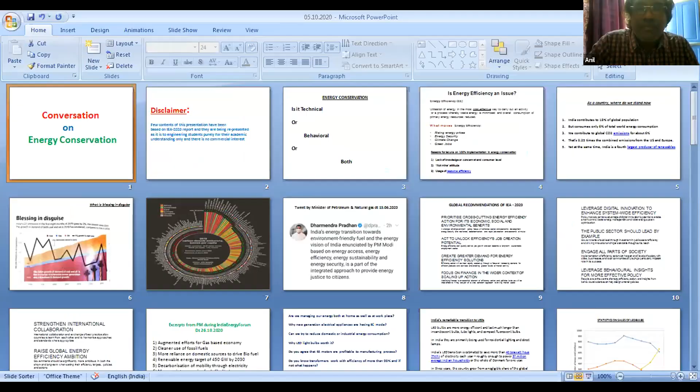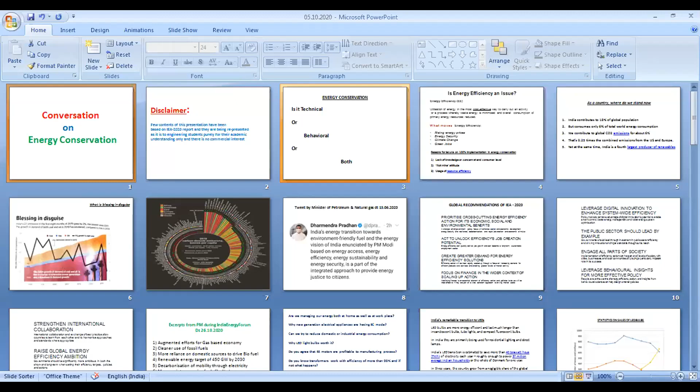I'll just share the presentation. Just guide me whether it is visible, audible, everything. Yeah, okay sure, sir. Is it visible? Hello? Yes sir, it is visible. So it is in slide mode, right? It's not in slideshow, sir. It is not in slideshow. Okay, yes. Can you click on the slideshow icon, sir? So that... yeah, slide can, but why it's not going? One second. How about... hello? Yeah, one second. Yeah, is it in slide mode? No sir, it's still in the... yeah, now it's in slideshow. Problem, yeah, now it's correct sir. It's in slideshow. Now it's correct? Okay, yes.

Good afternoon to all, one and all actually present for this program. I'm very glad for this program, just sharing my thoughts regarding something on energy conservation actually. As an institute or as a university, I'm sure you guys are doing a lot of innovations, incubations, and there is a quality oriented approach actually. This is the need of the day, to be more self-reliant under the Prime Minister's mission of Atmanirbhar Bharat actually.

Whenever we need to innovate, before that we need to understand the concept. In our domain, where energy is concerned, I don't think you guys can exclude this domain because you're all from mechanical engineering, or wherever, whether they belong to engineering stream or not. I don't think anybody can think of usage of energy, because energy in some way or other, in some form or another, is internally linked to our lifestyle, in personal capacity and in professional lives also. Nobody can think of doing any activity without usage of energy, because I can tell you, energy is the engine to the economy. Simple, that is my punchline, actually always I used to say. So let us have some conversation.

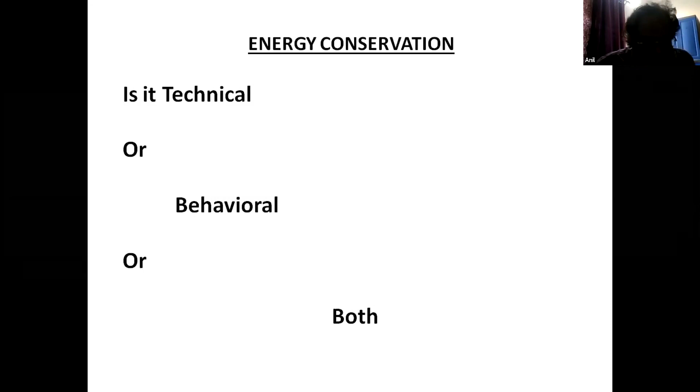At the same time, whether you have knowledge or not, first let us understand - we are not here, let it be water, let it be any food material, or let it be energy, anything. Fundamentally what we need to have is, we should not let any resource go to waste. We are here only to use it and to save it, so that it's reserved and preserved in the ecosystem for tomorrow's needs for all of us. So if you ask me, yes, it is both - it's behavioral, because the integration of both aspects only will give the full-fledged implementation.

So with this, I don't think energy efficiency is an issue, because energy efficiency is the next level of energy conservation actually. I'm sure you all know energy efficiency, so I'll not go into detail. Energy efficient is nothing but the most cost effective way of doing the activity with the available resources, while the output is more, the waste is less, consumption is less, and without impacting the process or activity, whether it connects to manufacturing or anything else.

Moving to energy efficiency - you all must be knowing, every day the petrol and diesel prices change at midnight. Why is it changing? Because government of India is trying to cushion out all the changes coming in the international scenario, because 90% of crude petroleum is coming from outside the country. So as and when they change the prices, we have no choice but to change our prices according to manage the changes in the international scenario.

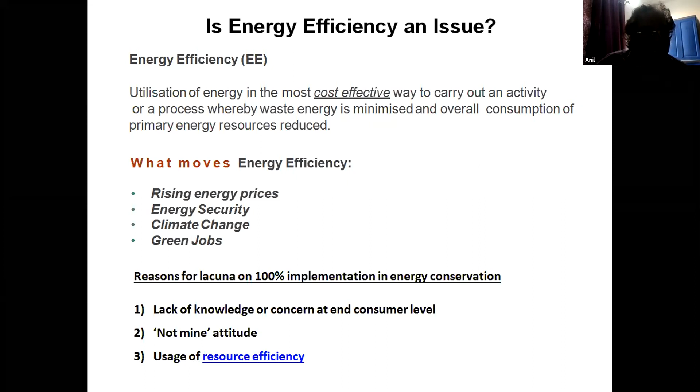Everybody should act responsibly. Everybody should act sensibly so that this most precious resource is saved. At the same time, everybody should know how to use the resource efficiently.

Let us take small statistics of this country. The population of India is almost 132 crore citizens, which is something close to 20% of the global population. But what is our energy consumption? Is it at par with the population? It is only 6%. Why is it so low?

Because we are in the first phase of the energy diagram. Let me show you a presentation. If you look at our energy consumption, which is 6%, it is not at all the average energy consumption of the world. It should be somewhere close to 10 to 12%. That means by the time it goes up to 12%, we would have the most advanced systems with high energy efficiency in practice available in our country.

At the same time, I am not saying just increase energy consumption without increasing efficiency and conservation in practice. We should increase consumption for the purpose of industrial activity, for increasing manufacturing activity, not just for the sake of increasing it. At the same time, I am contributing as far as emissions are concerned.

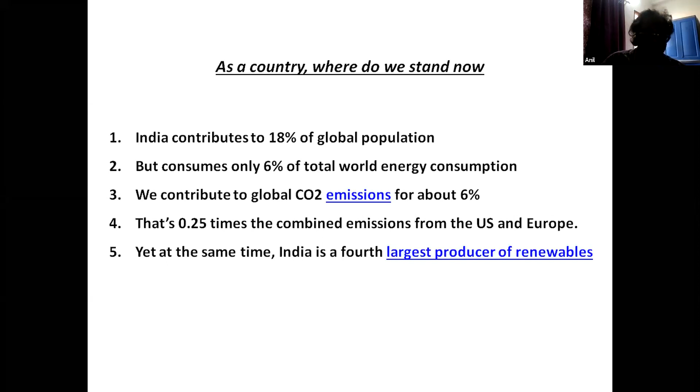Because of the pandemic situation, COVID has attacked all of us. In the month of March 2020, all industrial activity and manufacturing processes were halted because of the lockdown. Since there is no industrial activity, there is no pollution or emission. But we cannot clap for this, because industrial activity leads to an increase in GDP.

When we increase our GDP, it means our country is moving in a positive direction with respect to growth and other things. Now the economy is recovering, and we are now worried about emissions and pollution because pollution is now going up again. Let us see what all we have to go through.

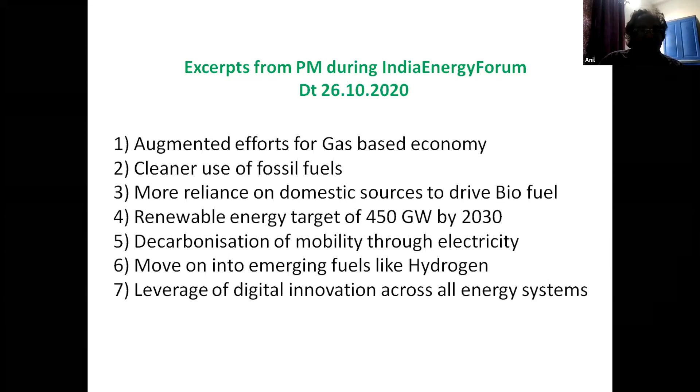Some questions, whenever you implement energy conservation: are we managing energy both at home and workplace? Why do new generation appliances have an energy conservation mode today? Even if you forget to switch off the appliances, they automatically go into energy conservation mode. For example, an air conditioner, you set the temperature and put it into energy conservation mode, and automatically when the room is shut off, the energy is saved. So this is nothing but the energy conservation mode.

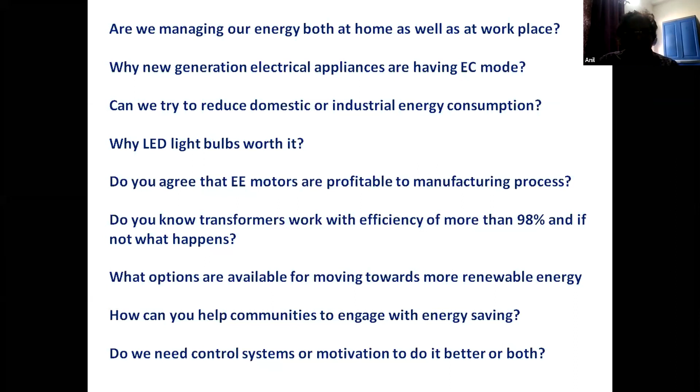Like that, how many of you know how LED bulbs are working? They are costly and expensive, but at the same time, when you compare with the performance of incandescent bulbs and CFL bulbs, normal LED lights will give a lifetime at least 5 times longer. So LED bulbs are really energy efficient. There are a number of questions we have to ask ourselves as and when we join the industry, like energy efficient motors, transformers, and what options are available, and so on. So this is the LED bulb story in the country.

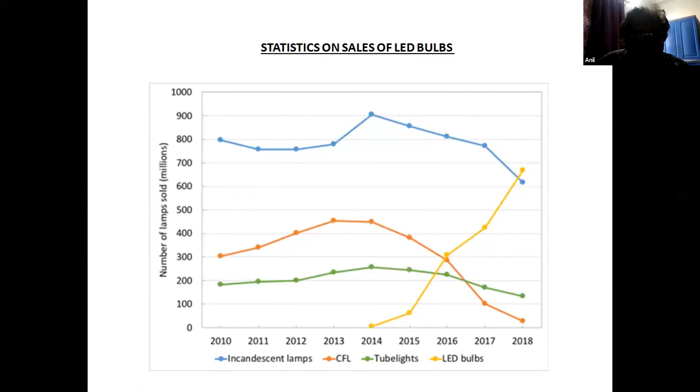Look at this. For the last 10 years, incandescent lamps are coming down, meaning usage of incandescent lamps and CFL bulbs is coming down. Tube lights are almost coming down too. At the same time, look at these LED bulbs, they are going up because of realizing the importance of the usage of LED bulbs so energy is saved. Just look at that, our neighboring state, Andhra Pradesh, and across every state, the bulbs and tube lights have been converted to LED bulbs. So these are the major achievements, friends.

Around 75 crore people have gained access to electricity, and the government is ensuring today the reliability of electricity supply. They have also started increasing the usage of kerosene and natural gas in cooking applications in the remotest parts of the country. Earlier in villages, they used to burn biomass for cooking. Today, everything has been converted. Other than that, off-grid electrification solutions, renewable wind, and so much energy is being generated.

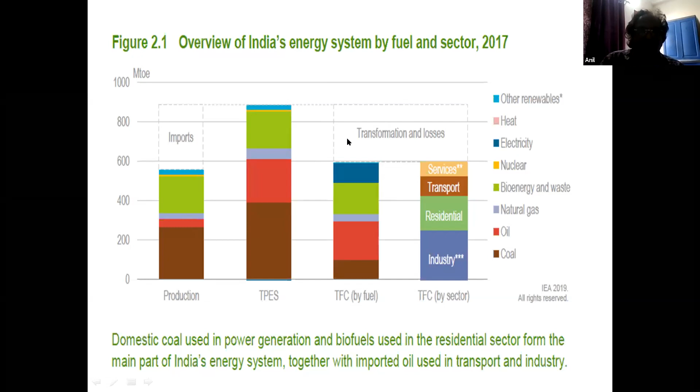Now this percentage is going up. Every sector has its own categorization of products. So just look at this. These are the trends in the growth of the economy.

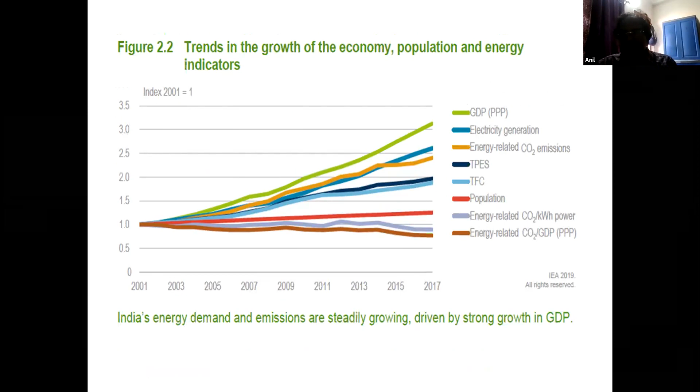The GDP is growing, electricity generation is growing, electricity energy related CO2 emissions are growing, total primary energy supply needs are growing, total fuel consumption needs are growing, population is growing, everything is growing. When population grows, everything grows, so consumption also grows, but at the same time we should develop a system so that energy conservation happens.

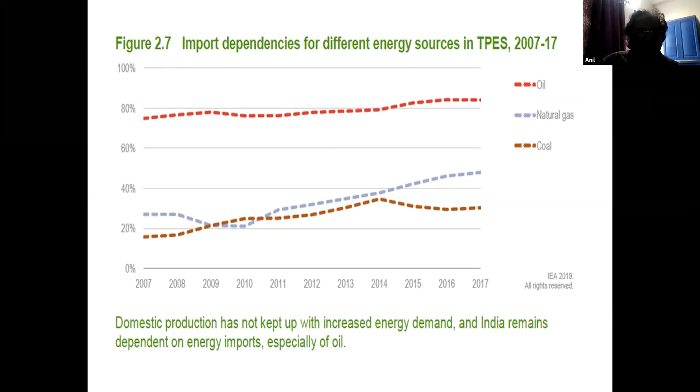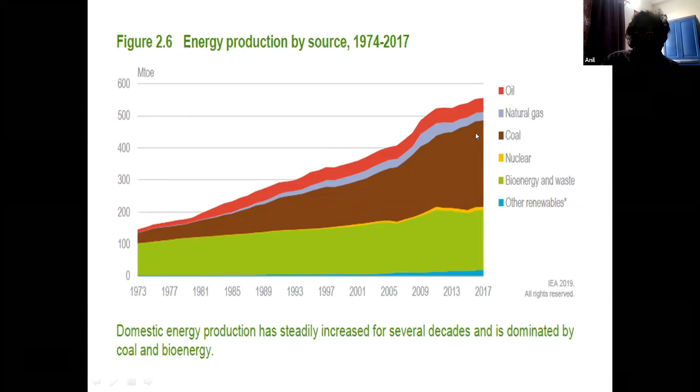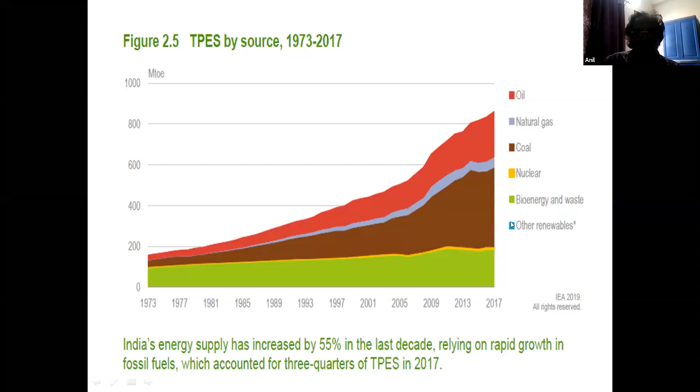And this is the total supply by source. That means I have to ensure the increasing needs of the population, and according to that I have to produce more, hence everything is in increasing mode.

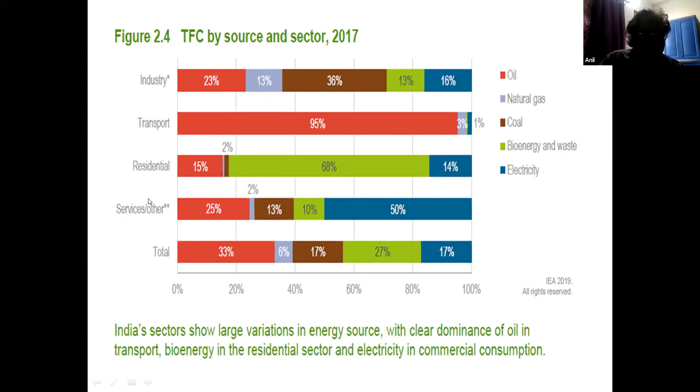Natural gas I am using for the generation of electricity. Coal, I am using 36% for the generation of electricity. And electricity, the final electricity usage, is also very high because I have to run operations. At the same time, this is the segmentation in transport, residential, services, and so on.

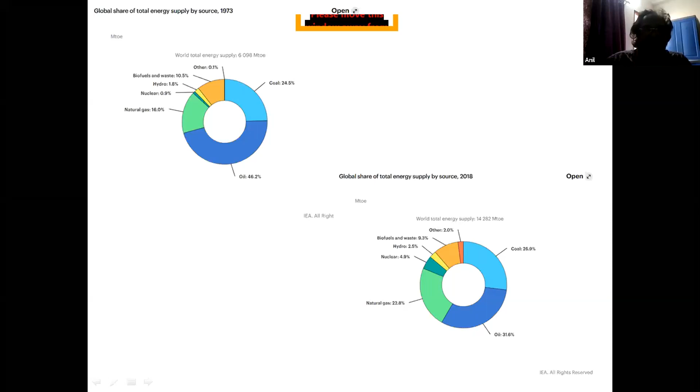So this is the story behind renewables and non-renewables. And 2020 is the turning point because of COVID and the pandemic situation, and of course a reset point for climate as well.

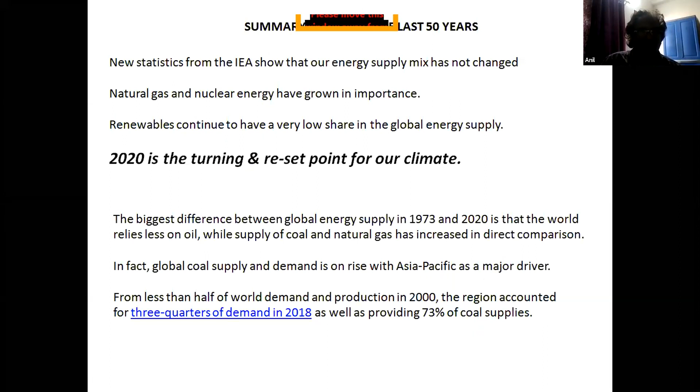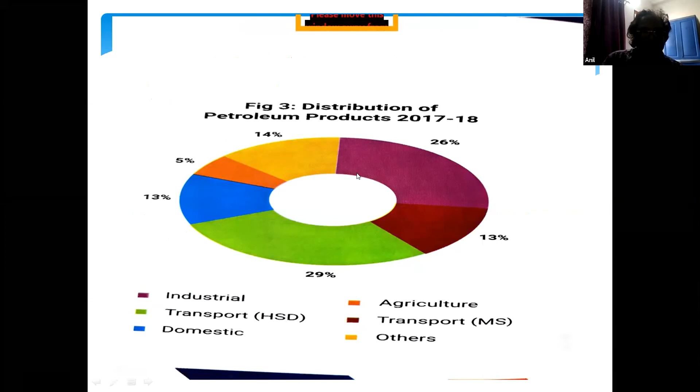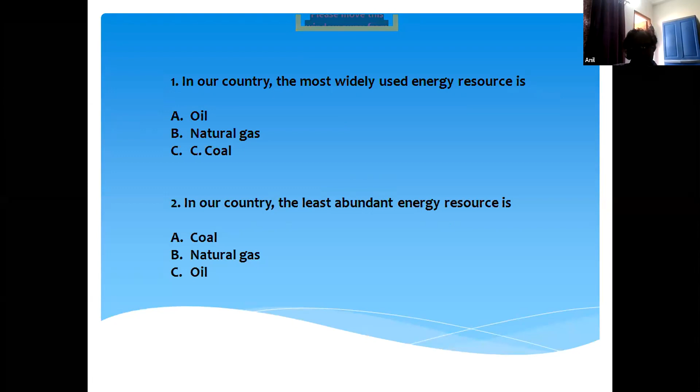In our country, the most widely used energy resources are oil, natural gas, and coal, whereas the scarcest resource is oil, for the simple reason that oil is not available domestically. 90% is imported from outside the country. This is the threat, my dear friend. If I continuously say save energy, you may not listen to me, but if I say this is the threat, possibly you might listen.

The oil reserves in the country will be there only for 20 years. After 20 years, I have no idea, I cannot guarantee whether oil will be available or not. But as far as gas and coal are concerned, no problem. Most of our processes are dependent on oil, hence we need to save petroleum products and oil-related resources. So we need this kind of education, to understand the process and couple it with experience, so that we can run our operations without any problem.

Metro is a classic example of energy efficiency because they don't use petroleum products, they only use electricity, and there are so many other examples also.

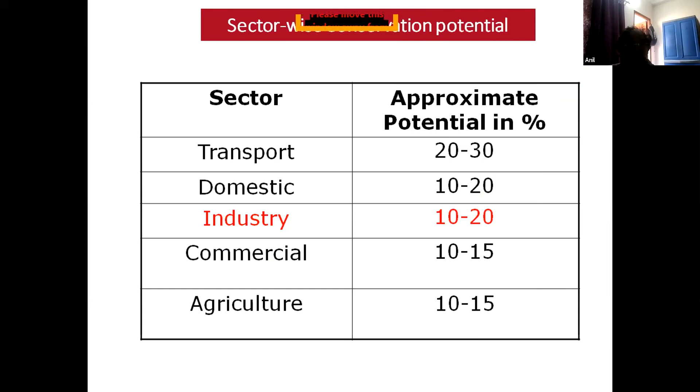transport, domestic, industry, commercial, agricultural—there is an approximate potential of somewhere close to 10 to 30%. Even today, if you decide, that much potential is available.

The Petroleum Conservation Research Association, as a part of the Ministry of Petroleum and Natural Gas, Government of India, is supporting the industry in terms of organizing studies, seminars, workshops, training programs, exhibitions, audits, consultancy, certification, so many things actually.

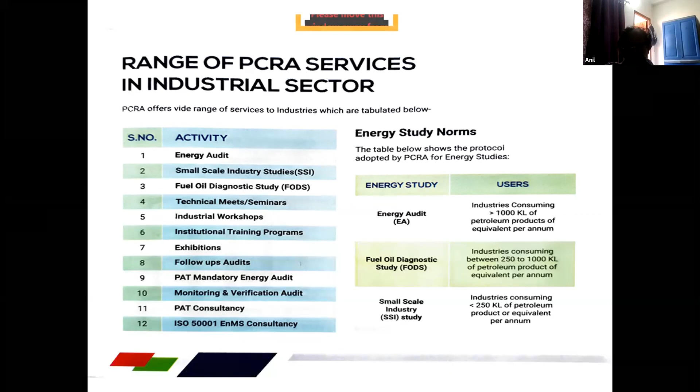That means the Government of India has given certain measures to all the large scale industries with high consumption of electricity, so that if they follow those practices, their electricity bills will come down, emissions will come down, and energy will be saved, both in terms of thermal and electrical.

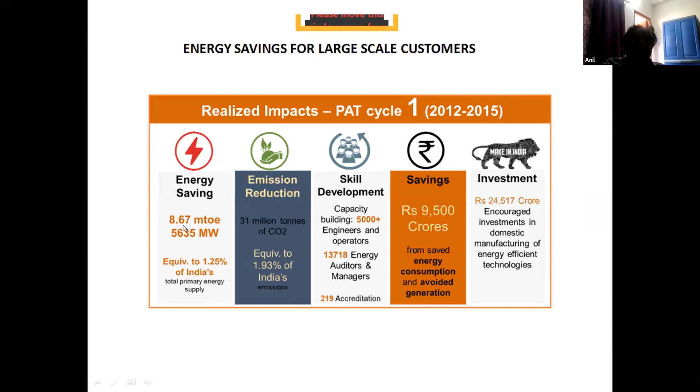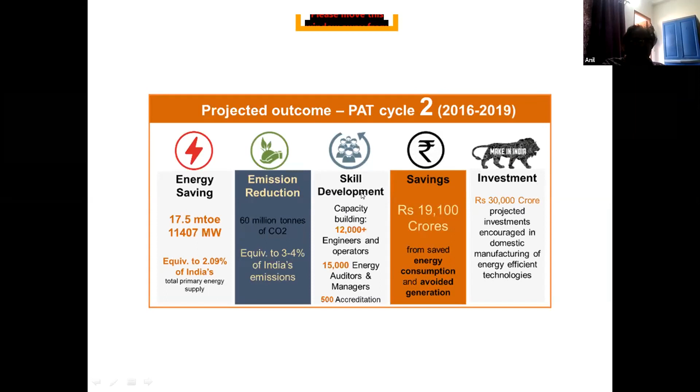In 2012, at the beginning of the program, there were hardly 400 customers. Today the number has gone up, almost double, to 800 customers.

So friends, you have no option—save energy. Saving 1 unit of energy is as good as equal to 5 units of energy generated.

In the year 2008, the Government of India saved somewhere close to 53,000 crores, other than thermal and electrical savings, and a lot of carbon dioxide emissions also got reduced.

These are the alternates, because yours is the Innovation and Incubation Council—start thinking on these aspects. I'm sure you all must be working on

ACs, air conditioners, and we are also trying to reduce dependency on imported petroleum products by adding biofuels. Today, the Government of India adds ethanol around 5 to 10% in petrol, and biodiesel around 5 to 10% in diesel.

The Government of India is saving somewhere close to 1 lakh crores. Other than that, new domains are opening up: electrical vehicles, LED lights, natural gas, geothermal, wind, biomass, and so many new areas.

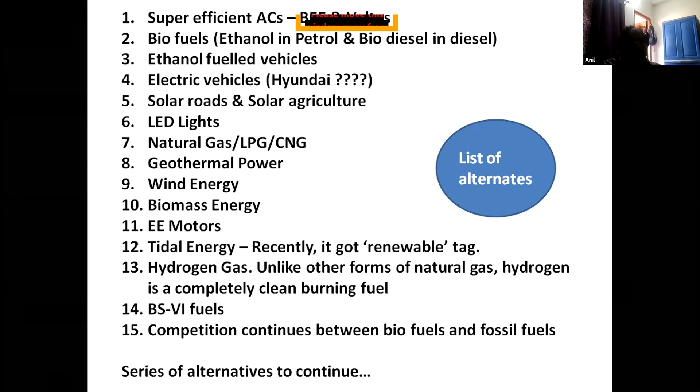These are the emerging areas for the institutes to work on. So PCRA also helps in

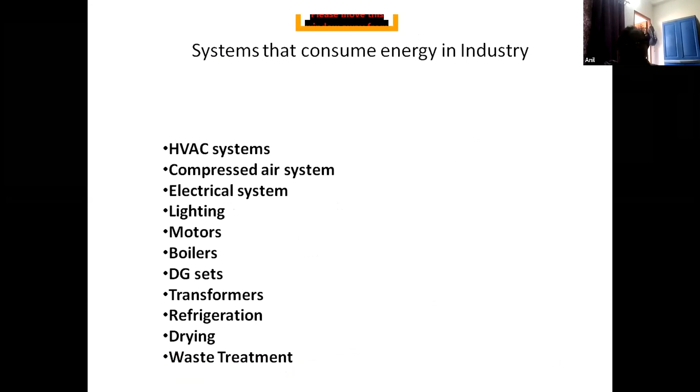management systems by organizations, institutes or industries via ISO 50001 certification, that consume energy in industry, starting from heating, ventilation, air conditioning, compressed air systems, electrical systems, lighting, motors, boilers. If I have to cover energy conservation fully, it is not possible in 1 hour.

So these are some examples of energy conservation. As I told you, the population goes on continuously, and at the same time, the demands will go up, but

the losses are minimized. The system efficiently distributes the available energy so that the system becomes efficient.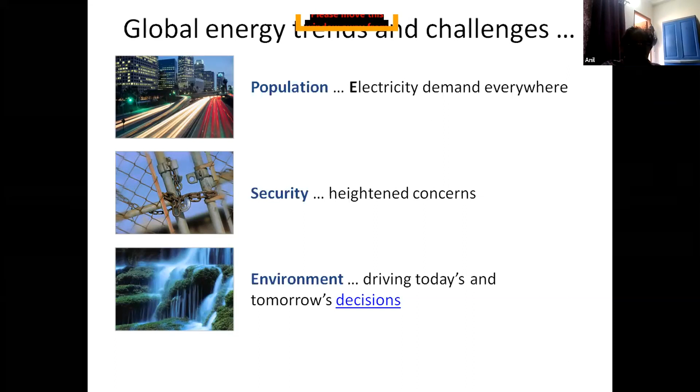Other than that, we must meet today's and tomorrow's environmental needs by causing less disturbance to the ecosystem.

The energy technology will be driven by socio-economic trends. So many changes are happening overnight. The government, academia, and industry have to play a role.

My first statement is: energy is the engine to the economy. Manage the resource and respect the resource. At the same time, try to create

something that helps you save the resource, and make it a habit. Take it as a habit. The life will be greener.

Otherwise, if you continue to misuse it, life will be like this. So thank you. The future depends on what you do today, and you have a lot of space to save energy.

This is a small program on some of the Government of India's initiatives and measures in the area of energy conservation.

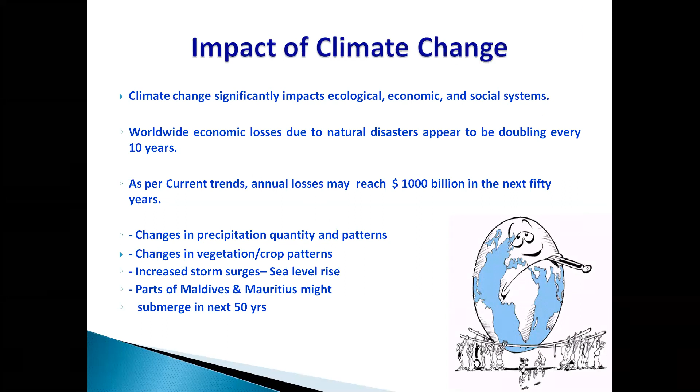So, global warming, everyone knows about global warming. Because of the rise in temperatures beyond 2 degrees, you can see this thing. In short, Chennai will be nowhere and Bangalore will become a coastal city. Having seen this, we'll see some of the next topics.

I'll rush through because he has covered most of the areas. So we will start with equipment, starting with compressed air. Air is always free, but compressed air is very costly, very expensive.

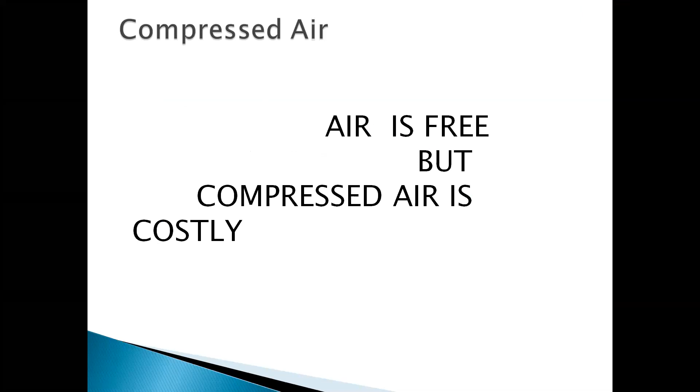When I say compressed air, what is the efficiency of the compressed air system? The compressor system means compressor, receivers, pipelines, and the FRL system all put together. The efficiency is just 10%, so obviously that is very, very less. If possible, you try to avoid compressed air to the extent possible.

There cannot be any industry which does not use compressed air. It's a very popular resource. That's why I'm starting with this.

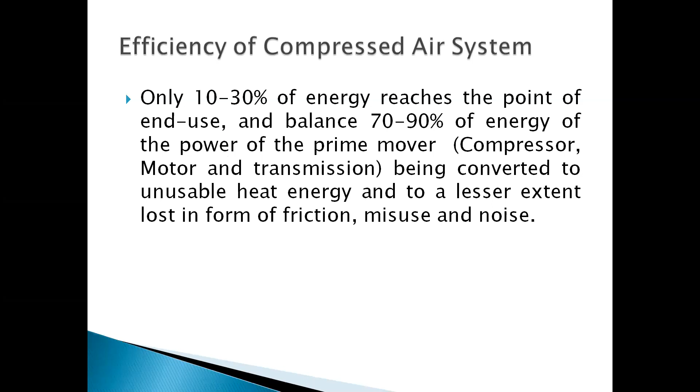Compressed air is denoted by free air delivery, at a standard condition of temperature, pressure, and composition. The factors which affect compressor performance are altitude, barometric pressure, and temperature. Compressed air consumption in winter is less, in summer it is higher. Similarly, what works at Chennai cannot work at the same efficiency when you go to Coonoor or Ooty, because of the difference in altitude and pressure.

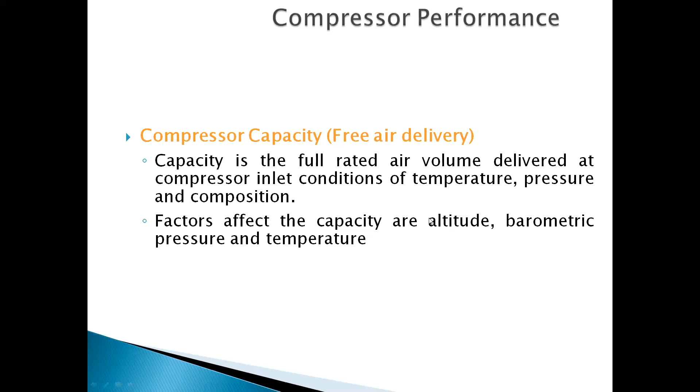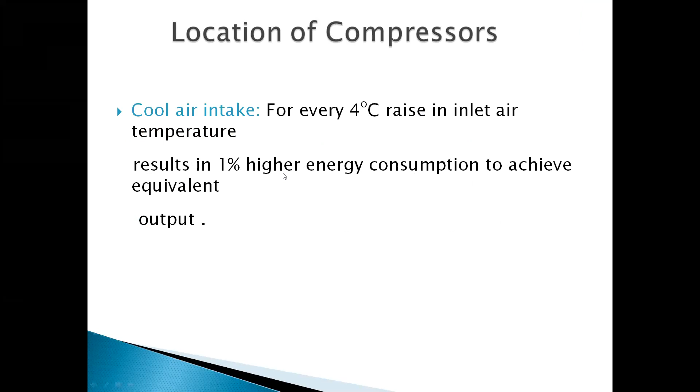This is the thumb rule: for every 4 degrees rise in inlet temperature, 1% higher consumption will be more. And again, elevation, we discussed.

The other problem is, don't standardize on pressure. Use the pressure only what is required. Reduction of even 1 bar will reduce your energy consumption by 6 to 10%. What happens when you require different pressures? For example, some machines may require 5 bars, some may be at 6 bars, some at 2 bars, and so on. You should have separate lines, segregate the lines.

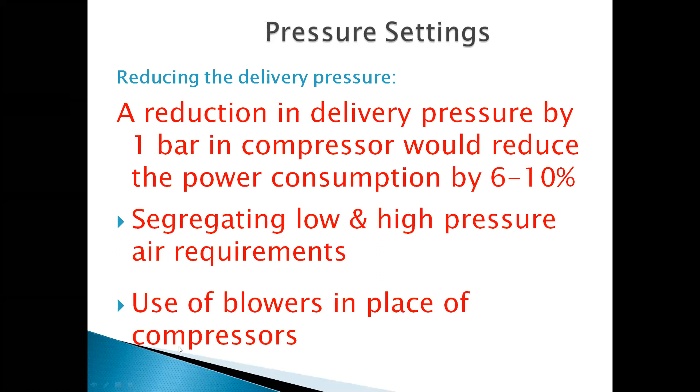Where the pressure required is less than 1.5, use blowers instead of compressors. Eliminate compressed air there, that is important. So check the pressure drop randomly.

Even in your labs you might have seen the compressor. Check the compressed air pressure. When the pressure drop is above 0.3 bar, maybe there are some losses, transmission losses may be there. Sometimes we have the habit of adding more and more compressors at the source side without bothering about the line. So rework the line, or there could be leakages, or the demands could have increased. We check it up, that is the idea of frequent pressure drop measurement.

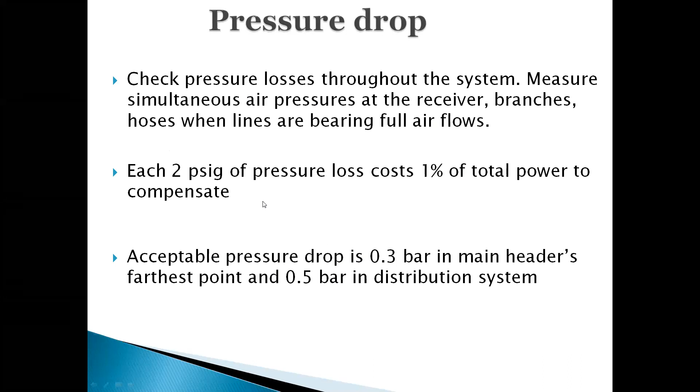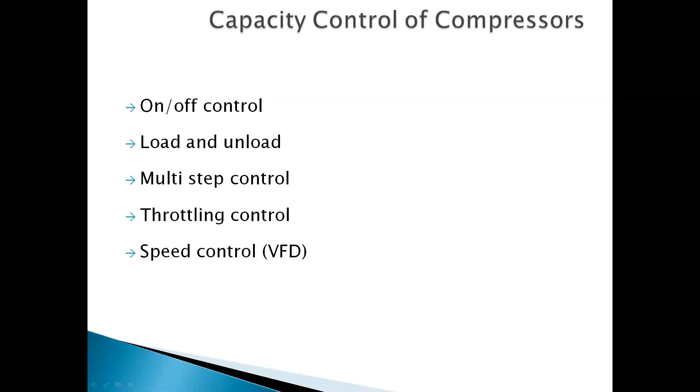Let us see one problem. Compressor leakage is very common in industry, so you need to quantify the leakages. All you need is a stopwatch, nowadays even mobile phones are okay.

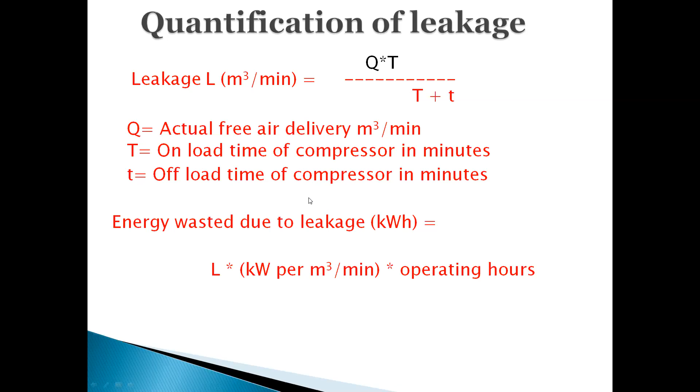You stop the compressor, use the line's supply, start the compressor automatically, it goes to full load, then cut-in cut-off takes off. Then there is a simple formula, and you can calculate how much percentage you are wasting due to leakages.

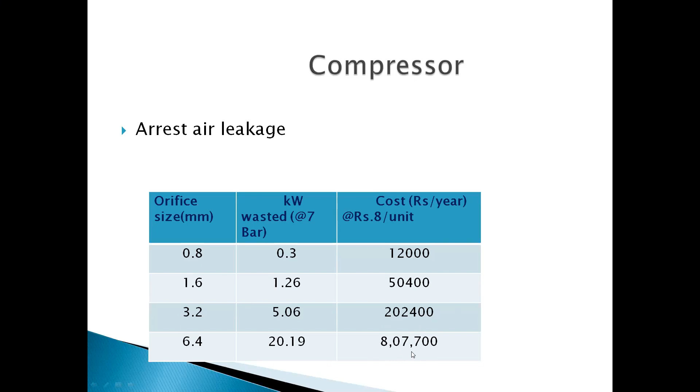Second one, pumps and fans. We'll go to the next equipment. Pumps are very common, even in industry, agriculture, everywhere. And all centrifugal fans and pumps exhibit the identical characteristics. They follow one law called the affinity law.

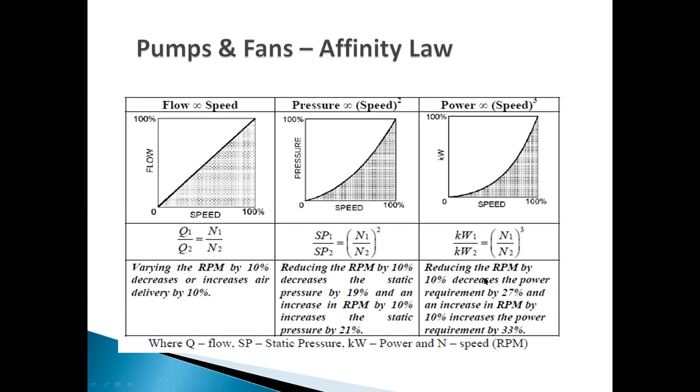When you reduce the speed by 10%, your flow is reduced by 10%. Pressure by 19%, power by 27%. So again, the conventional method, start-stop control, is there. Bypass valve, there won't be any savings. Again, throttling is a very bad practice, not a good practice at all.

If you oversize the pump, you can trim the impeller to the excess, to the tune of around 10%. Or you change the pump itself. Or the other option is variable speed drives, where there is a fluctuation in load.

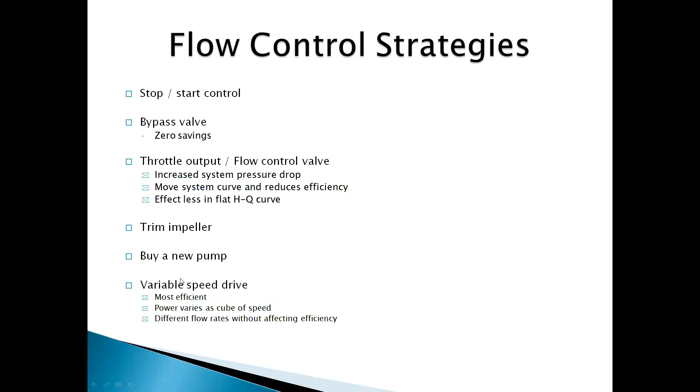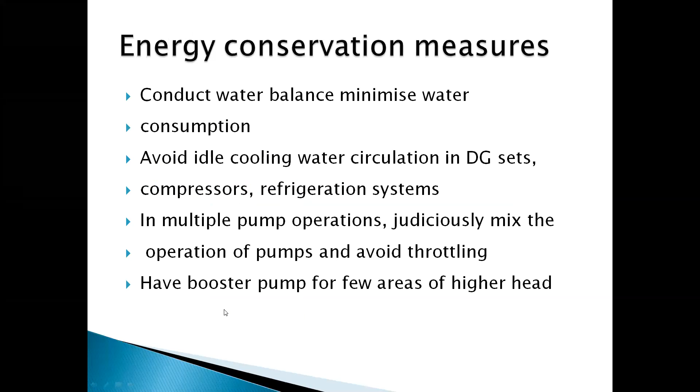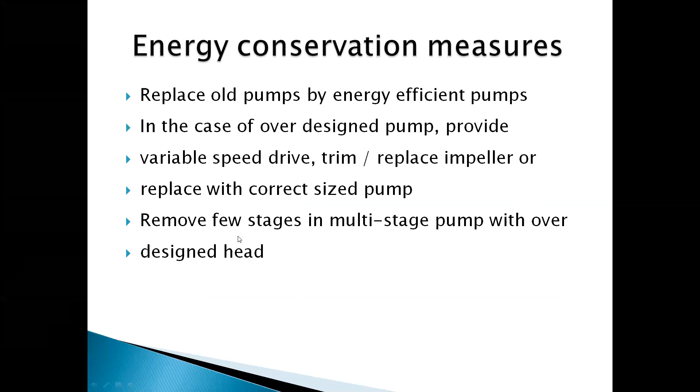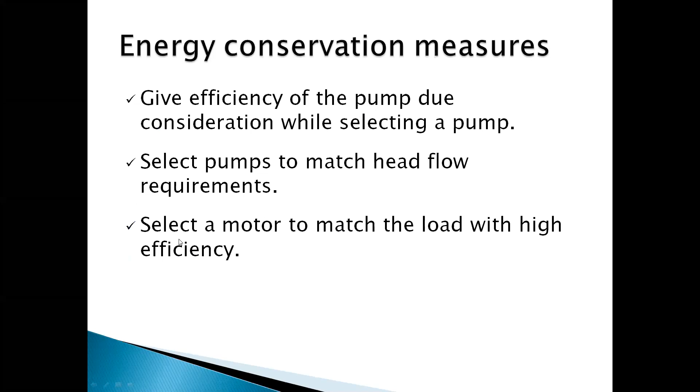Whenever you are selecting a new pump, give efficiency of the pump due consideration. And most important, select the motor to match the load, don't oversize it, so that the efficiency is maximum - an energy efficient motor and an energy efficient pump. What is an energy efficient motor? We will see a little later.

Okay, all these things we discussed. Then we'll go to lighting. Lighting - the operating cost is 85%, initial cost is only 15%.

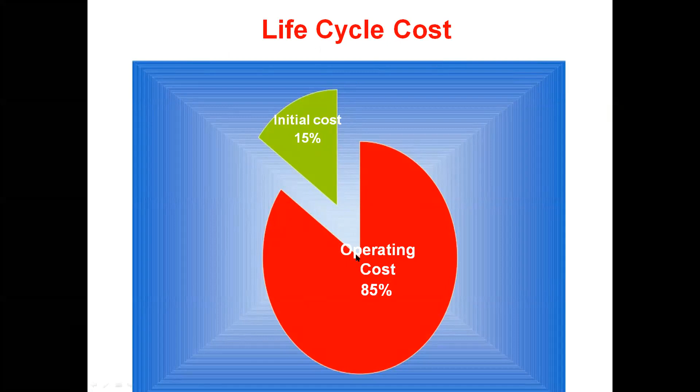Focus always on the operating cost. So we will see what is the color rendering index. I'm rushing through due to paucity of time. When the CRI, the color rendering index, is close to 100%, as at sunlight where CRI is 100%, you will see a more clear picture. As it keeps reducing, you will see a distorted picture, sometimes different colors.

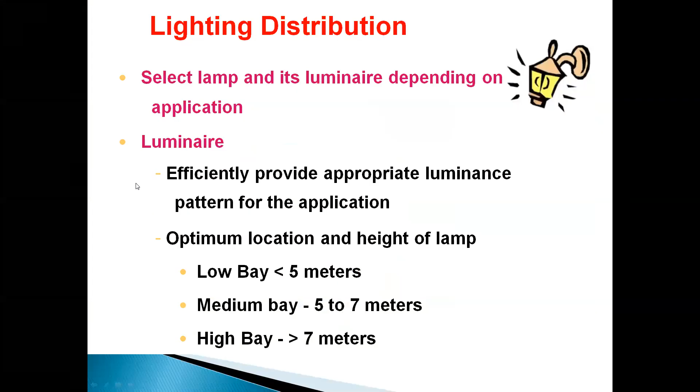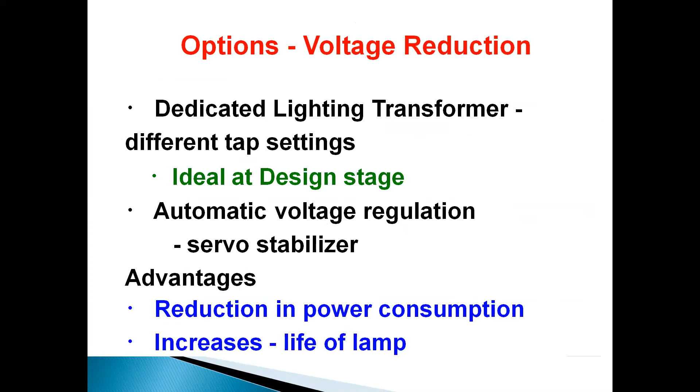So next, lighting control is important. Always distribute it properly - don't keep a single switch for all the lights. That's not a good practice.

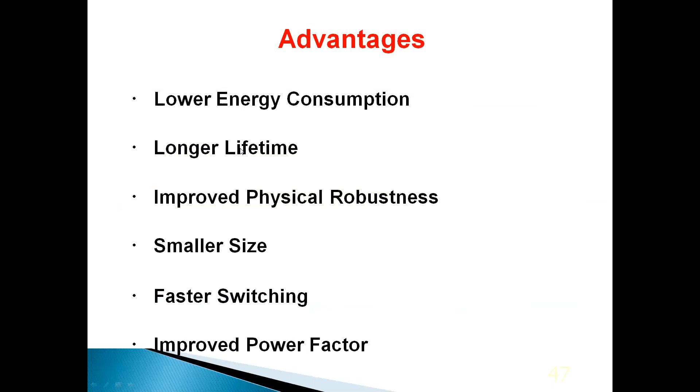LED lifetime is around 1 lakh hours, so LED is a very good option. It's also a somewhat greener option. One case study: a 150 watt light replaced with a 30 watt LED light gave a payback in 17 months. The advantages are longer lifetime, you don't need to keep stocks, and of course avoiding mercury.

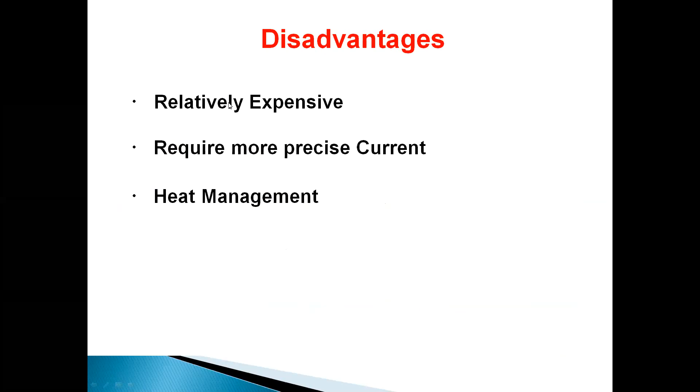Disadvantages - heat management is very important, don't go in for a cheap make. It's relatively expensive, initial cost is more, but if you work out the life cycle costing, it will be viable. So use light pipes to maximize your solar lighting.

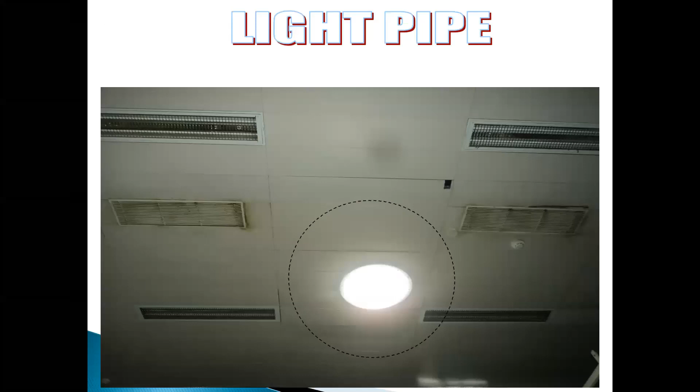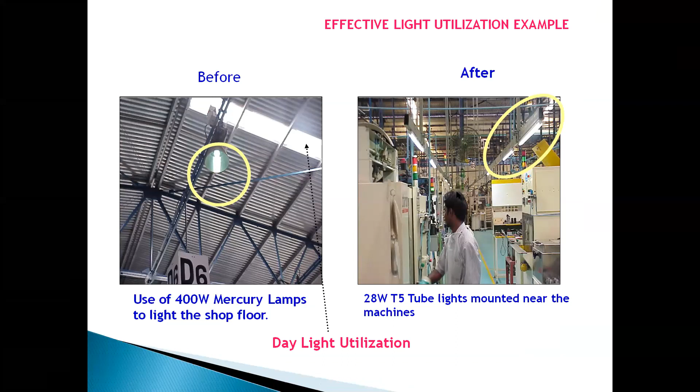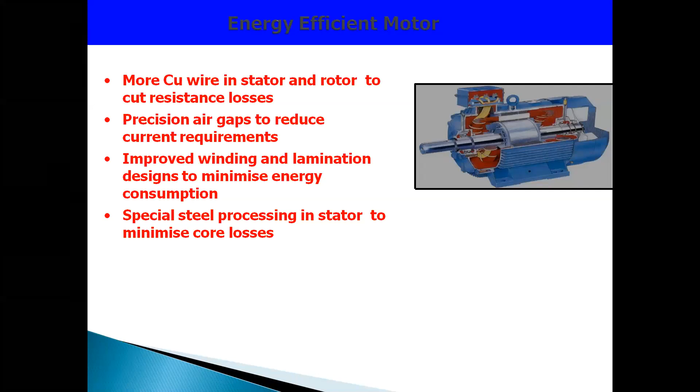For energy efficient motors, we will say one thing - whether it's an energy efficient motor or a standard motor, the loading is very important. Always operate the motor at more than 60-65% loading, otherwise it's a waste of energy. If you are loading at 25%, you are losing efficiency.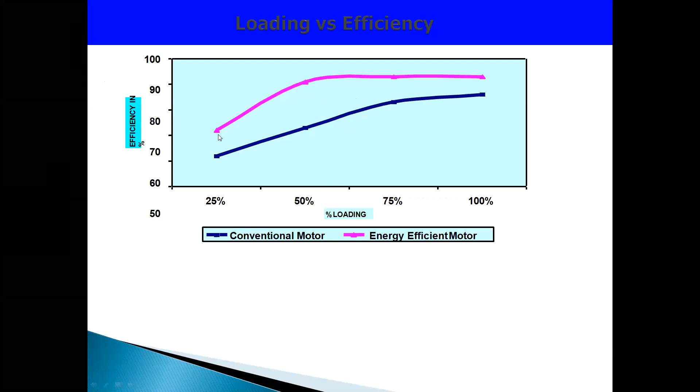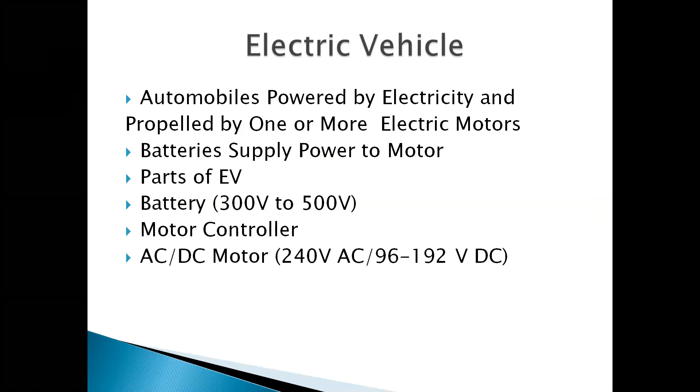So, renewable energy, I'm not touching upon due to paucity of time. Electric vehicles are another option. By 2030, about 30% of vehicles are expected to run on electric motors.

This is a comparison between IC engine and EV. Efficiency of IC engines is very low while EV is very high. Fuel is of course expensive. There's only one problem: the battery needs to be changed every 5 years, but it will have the same performance. Moving parts are less, life is also high, and the pollution level advantage is high.

Particulate matter is less, but for charging electrical vehicles you should use renewable energy. There's no point going back to fossil fuel - it will cause more disasters and trouble rather than benefits.